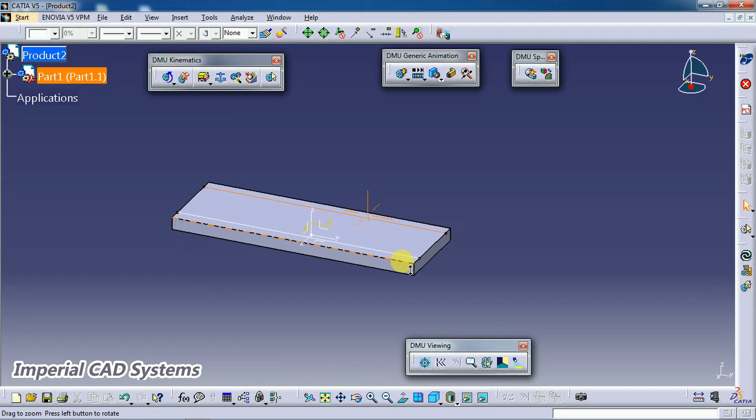And you can see here a line on both sides. I created lines on the surface of this box. Now I call another part, Insert, Existing Component, Product.

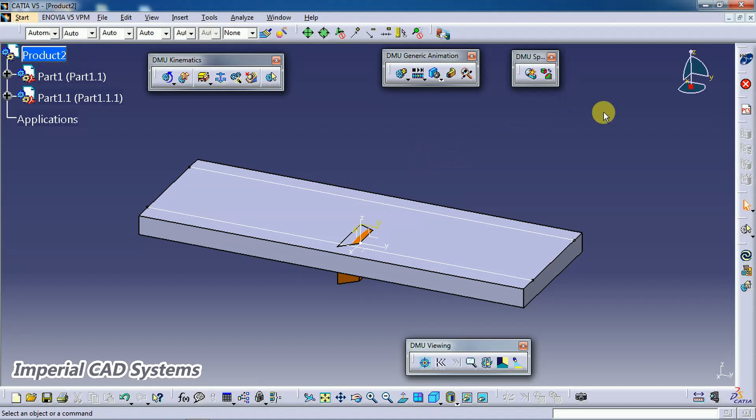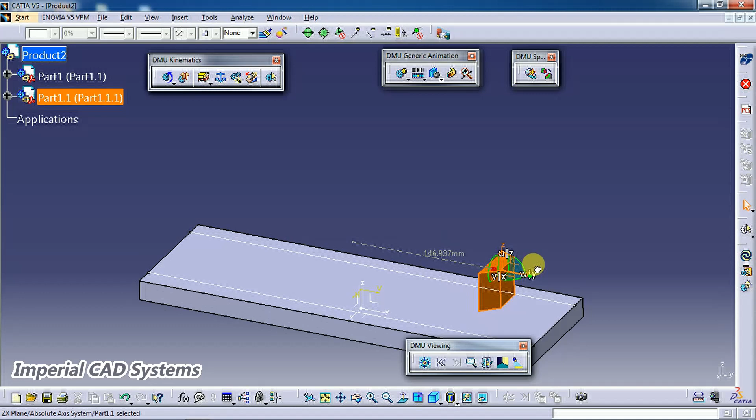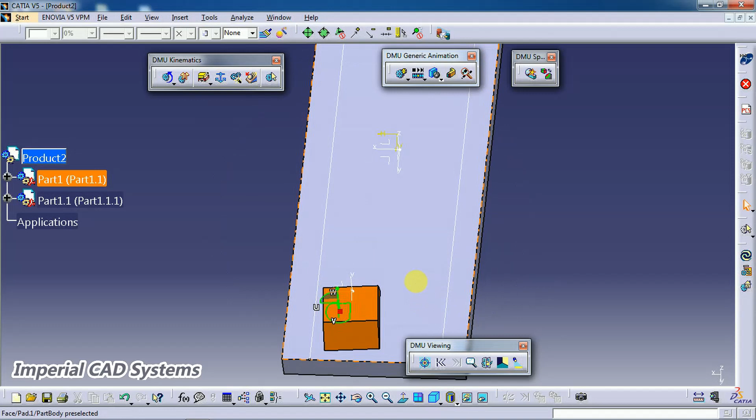To move this, as we are not in assembly workbench, you can also move this by going into assembly workbench, or simply use this compass to move, to rotate, whatever. Just place it on the surface and move like this. I rotate like this. Okay, let it be there.

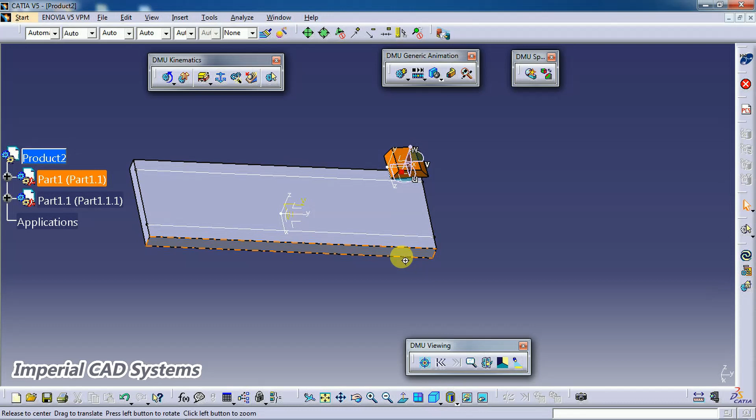Then this part has to move along that path or along this line. I also get the same part here and place it on this line, connecting to this line. So for that, I move this compass.

I again go to Insert, Existing Component, select the product. I call the same part, or you can call another part also. I move this part.

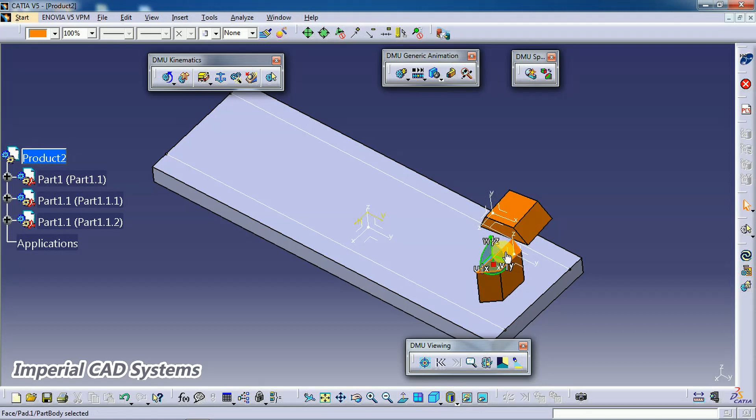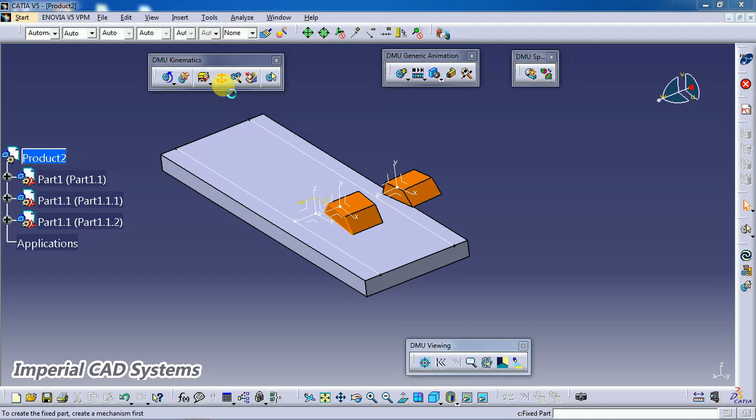Now, cable joint - what does it do? It means I want to move these parts along this line, along this path. For that, first fix the base. I go to Fix option, Fixed part, New mechanism, go for OK. Select base part, then it is fixed.

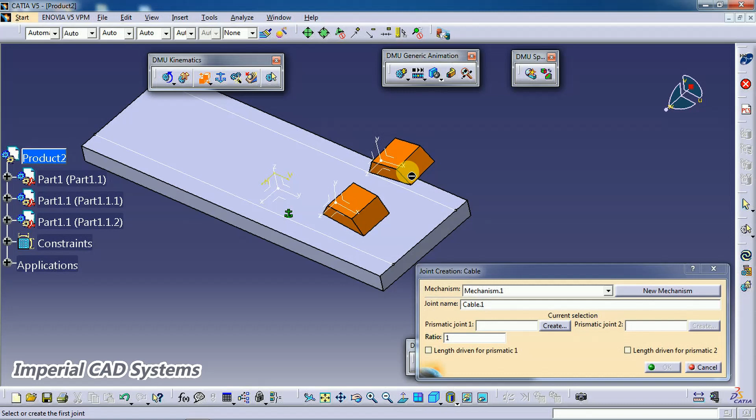Now get into cable joint. Cable joint is somewhat similar to prismatic joint. It moves the part in one direction along a path, along a guide, whatever. So the same type here, we can simulate two parts along two paths, and also here there is a speed ratio.

Here see how to apply options, how to apply constraints. For this you can see prismatic joint 1, prismatic joint 2. Go to create option here, select this create tab.

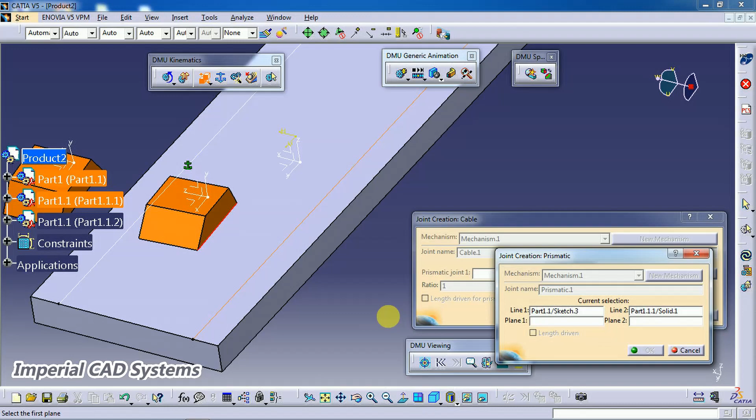Now for line 1 I select this line, for line 2 I select this edge. Plane, it should contact this surface, plane 2 this should contact this surface, then go for OK. See here, it coincides to this line.

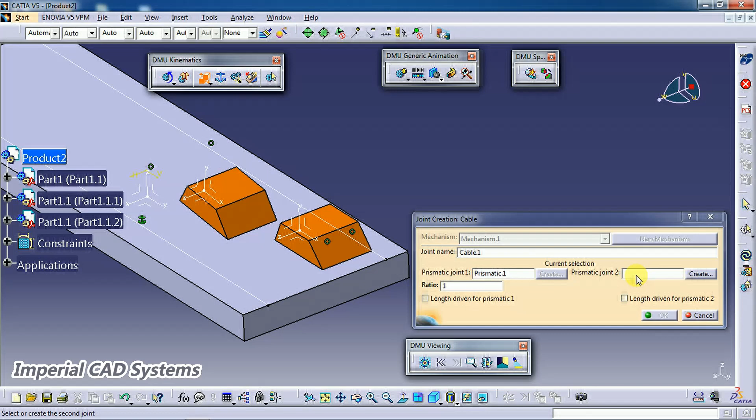Then for prismatic joint 2, go to create option, line 1 is this edge, line 2 is this path, plane this surface, and plane 2 this surface, the base surface. Then there is also one placed on the base.

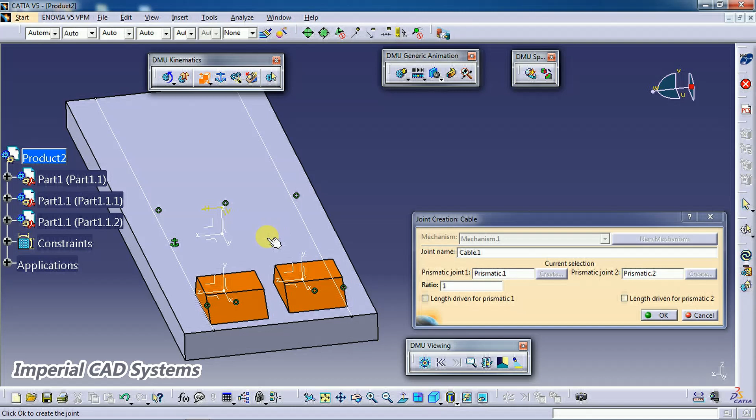Now if you keep ratio 1, then these parts move along this path with a constant ratio, constant speed like that. Now if you want part 2 or part 1, whatever, to move faster than the other part, then what I do is give the ratio 2, meaning 2 times. Say suppose this moves up to 10 mm distance, then this moves 20, like that. This moves 50, then that will move up to 100 within the same time.

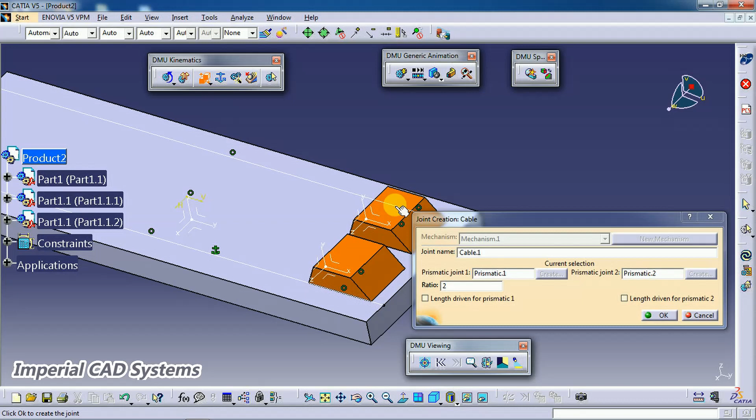Next, ratio 2, double ratio - which one needs to be applied for? Is it for prismatic 1 or prismatic 2? See, this is prismatic 1 and prismatic 2 joints, 2 joints we created. So I apply prismatic 1 for a 2:1 ratio. Then I go for OK.

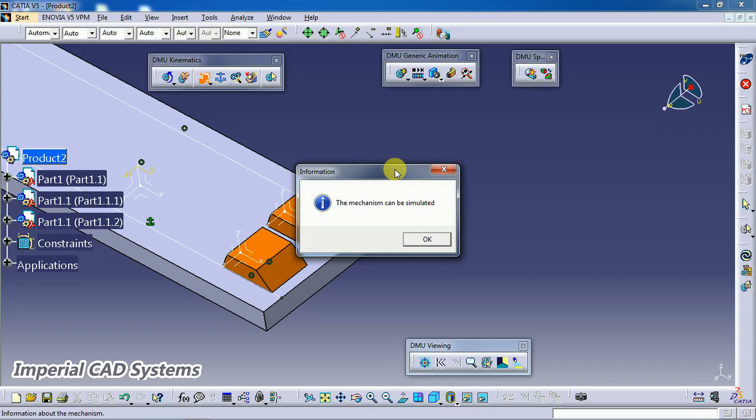Now this pop-up shows that a mechanism can be simulated. Then go for OK. Now go to simulation option, select this mechanism 1, go for OK. Now see here.

The first joint is moving further ahead of the second joint. See, I increase the end value by going into this and making it 100, then 250.

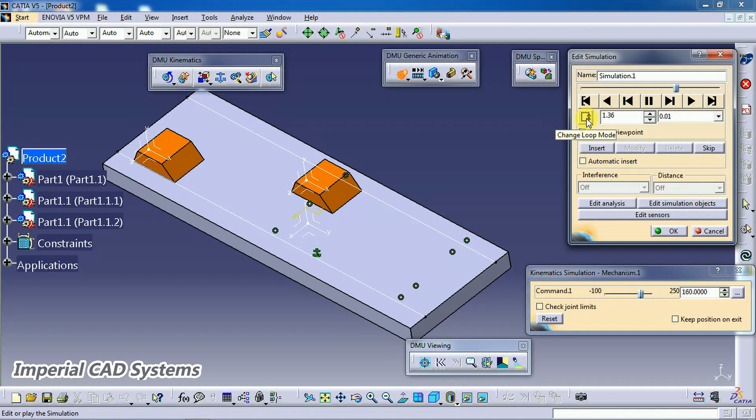Then go for OK, up to 250 it will move, and it will start from here. Then go to insert, reduce the speed to 0.01, then I apply play. See, like this. Change loop - only one time it translates, then it stops. Change loop mode, I click once again, it translates to and fro.

So with a 1:2 ratio, the distance it reaches will be twice the distance the other part reaches. I increase the speed of the part movement. See, like this.

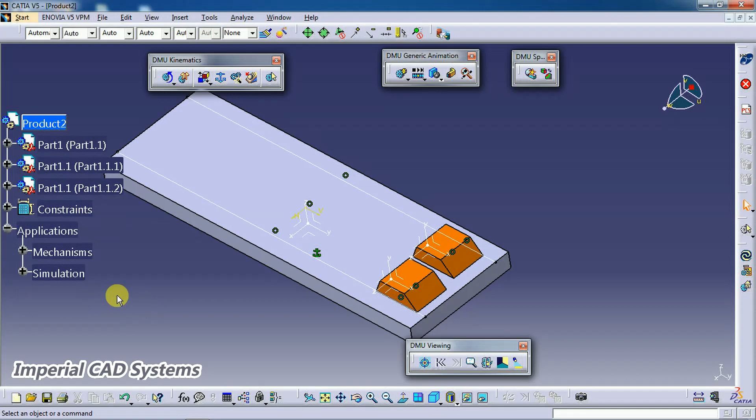So like this, we need to use the cable joint option for Catia V5 assembly. Then go for OK. Here in the application you can see the mechanism's degree of freedom is 0.

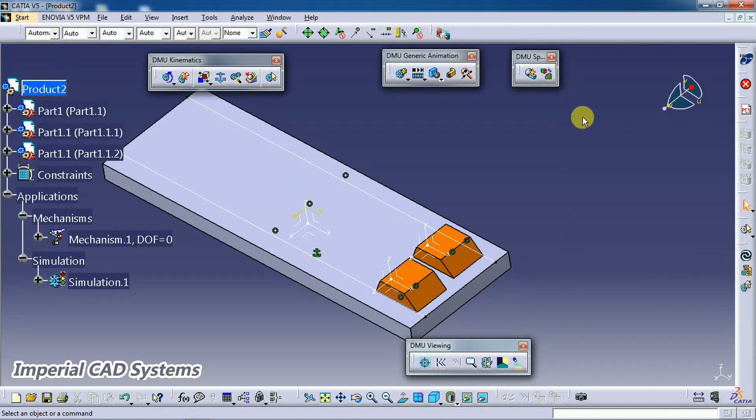For simulation, if you want to simulate it again, double click on that, then just go for play. Change this speed ratio, keep this one at 1, and this at 0.01. Then play like this.

Make use of the cable joint option in DMU Kinematics.